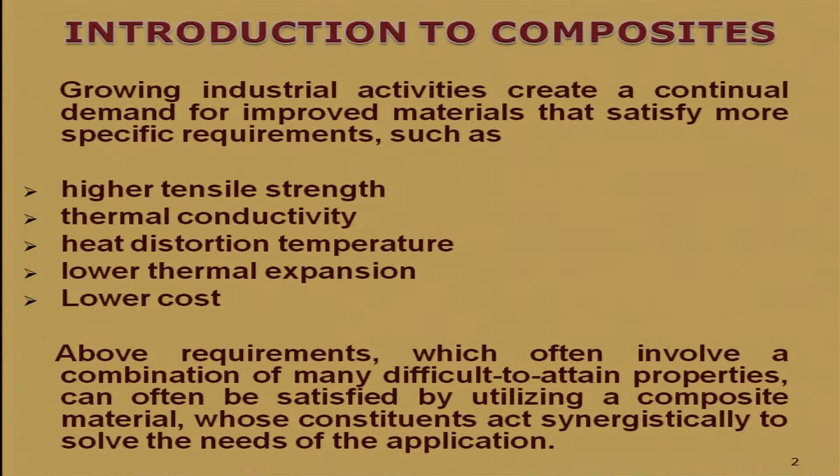Growing industrial activities create a continual demand for improved materials that satisfy more specific requirements such as higher tensile strength, thermal conductivity, heat distortion temperature, lower thermal expansion, and lower cost. These requirements, which often involve a combination of many difficult-to-attain properties, can often be satisfied by utilizing a composite material, whose constituents act synergistically to solve the needs of the application.

Definitions of composites: Composites are multifunctional material systems that provide characteristics not obtainable from any discrete material. They are cohesive structures made by physically combining two or more compatible materials different in composition and characteristics, and sometimes in form.

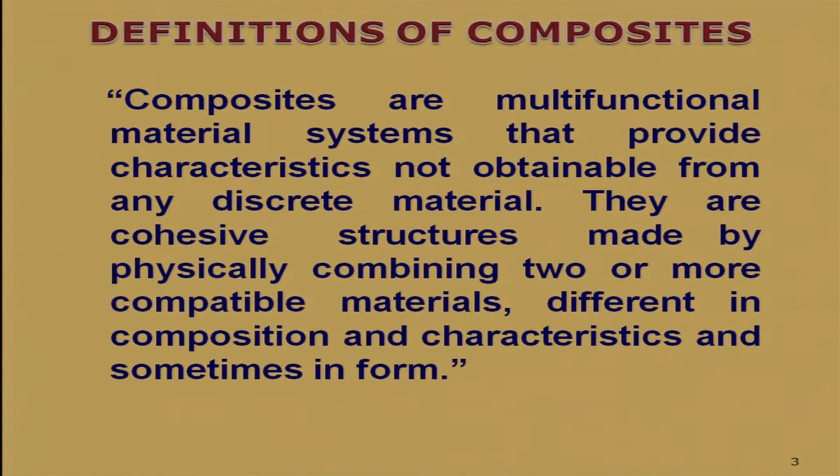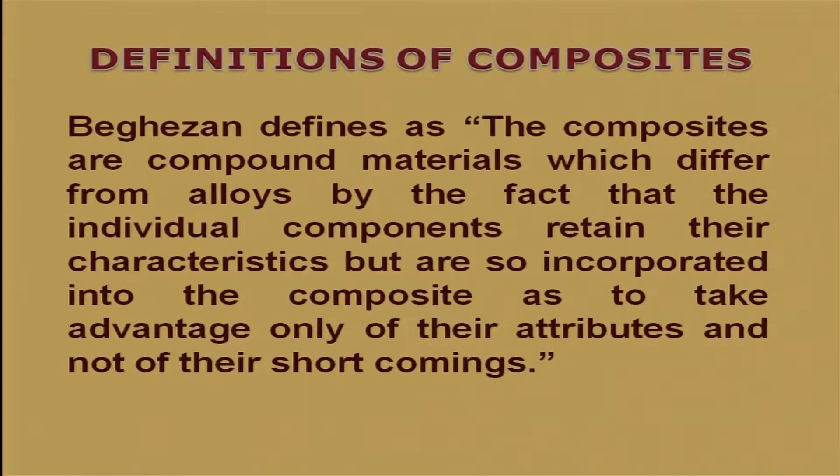Beghezan defined composites as compound materials which differ from alloys by the fact that the individual components retain their characteristics, but are so incorporated into the composite as to take advantage only of their attributes and not of their shortcomings. Now, composites can be explained by two different methods.

Composites can be classified into metal matrix composites, polymer matrix composites, and ceramic matrix composites. Composite material consists of two phases: one or more discontinuous phases, called reinforcement, embedded in a continuous phase called matrix. Composites can be classified into three categories: metal matrix composites, polymer matrix composites, and ceramic matrix composites.

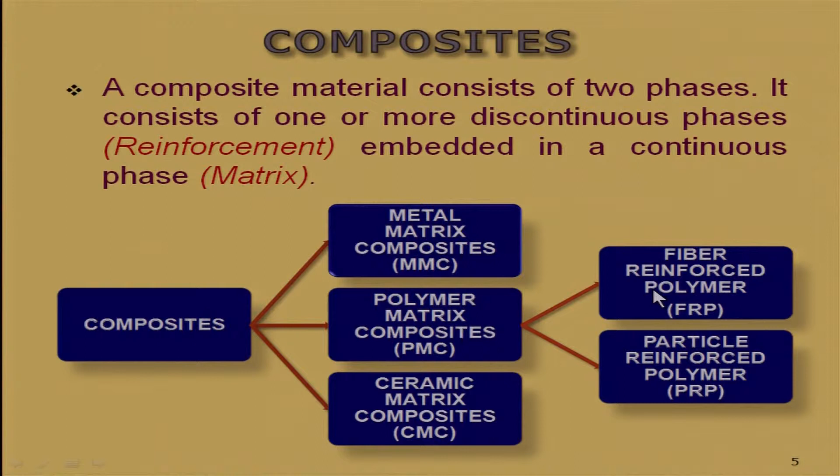We will focus on polymer matrix composite, which is subdivided into fiber reinforced polymer and particle reinforced polymer.

Advantages of composites: tensile strength 4 to 6 times greater than steel, 25 to 50% weight saving than metal, outstanding corrosion resistance, numerous fatigue and fracture attributes, excellent impact and damage tolerance characteristics, less noisy and lower vibration than metals. Like metals, thermoplastics have indefinite shelf lives and low thermal expansion.

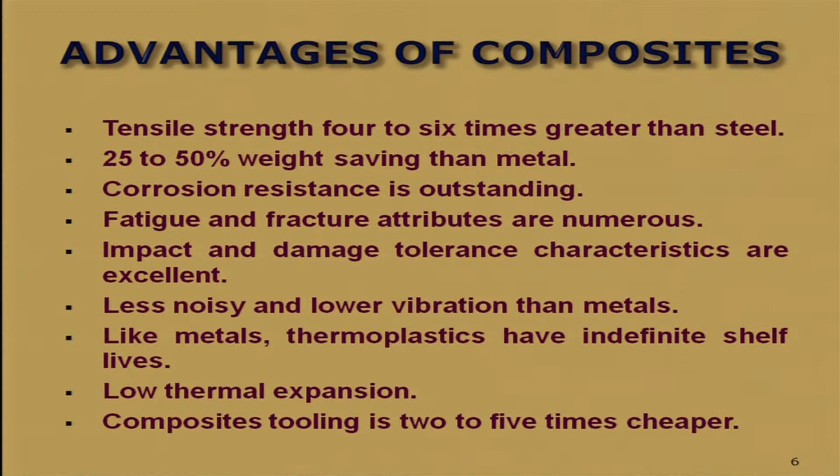Composites tooling is 2 to 5 times cheaper. Polymer matrix composite can be subdivided into fibrous composites and particulate composites.

This figure explains fibrous composites. These are the 4 figures in which various fiber patterns are shown.

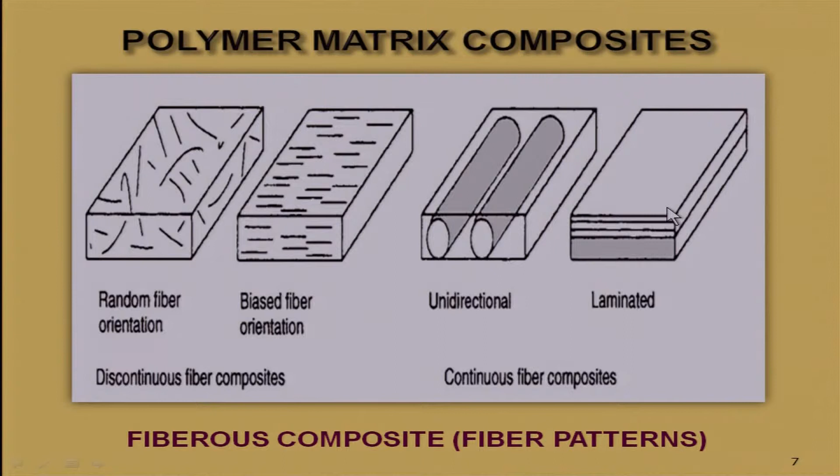In this one, the fibers are arranged randomly. In this one, bias fiber arrangement is used. In these, fibers are arranged in a unidirectional manner, and in this 4th figure, the fibers are laminated between two layers. Fibrous composites can be made by different techniques.

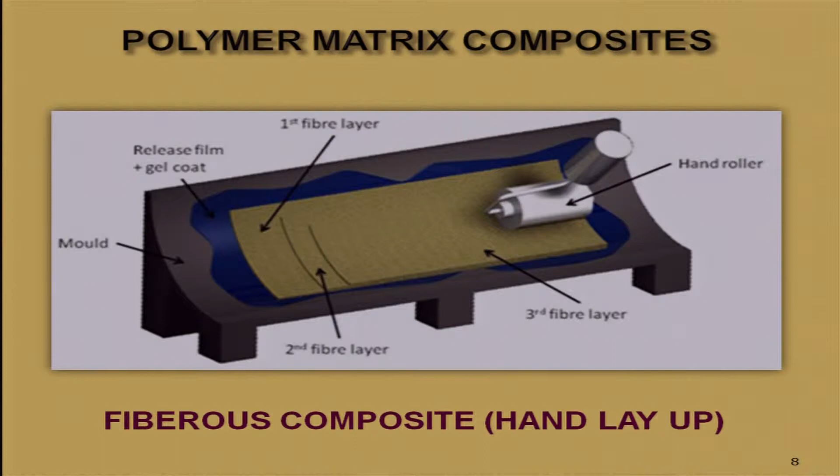This is the hand layup technique, in which the fibers are arranged manually and polymer is sprayed over the fibers, and the composite structure is prepared.

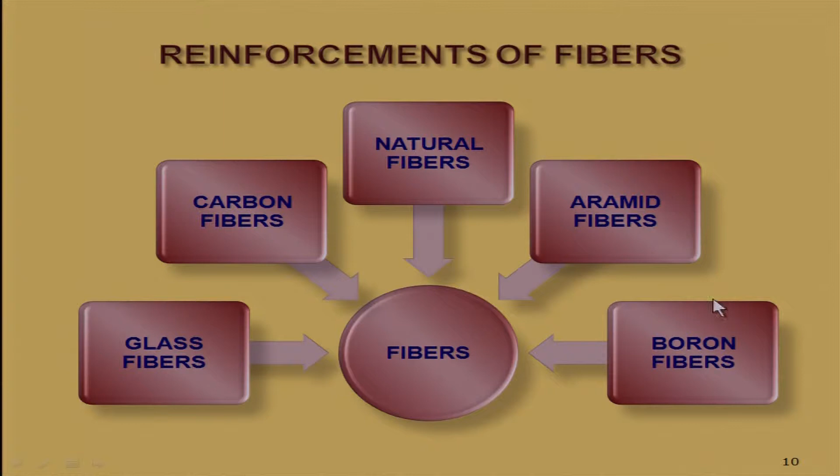The various fibers used in composite manufacturing are glass fibers, carbon fibers, natural fibers, aramid fibers, and boron fibers. The use of a particular fiber depends upon the end use application, which may be aeronautical, automobile, or customer-friendly applications.

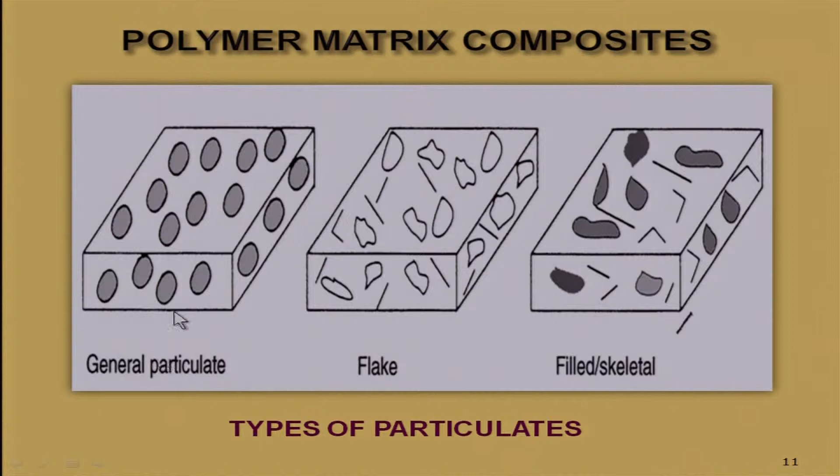The second method is particulate composite, in which 3 types of particulates are used: general particulate, flakes, and filled or skeletal type particulates. This is the method by which particulates are embedded in the resin structure. The particulates are added into the hopper, mixing with polymer material.

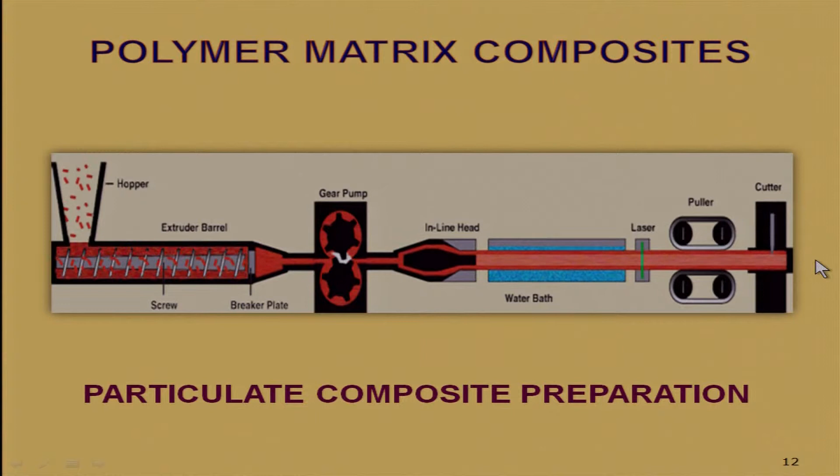In the barrel, the material of polymer and particulates is mixed, then they are stretched by the pullers and finally cut into granules.

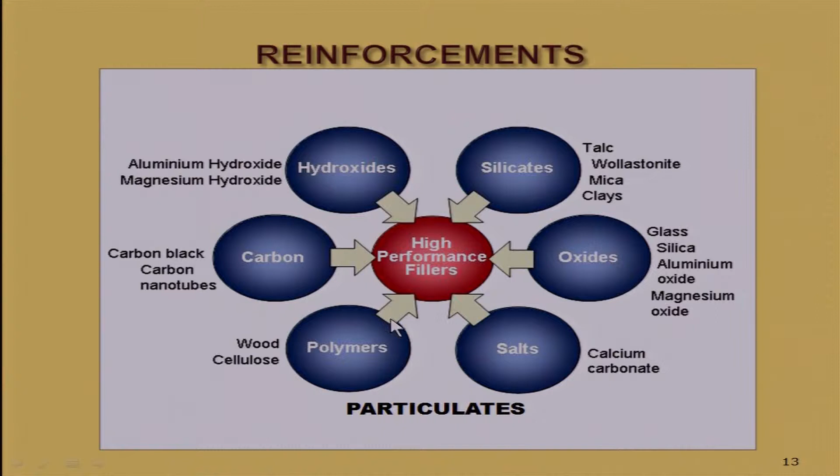Various particulates used in composite manufacture are hydroxides, silicates, oxides, and salts, along with polymers and carbon. These various forms of particulates are used for manufacturing various composites.

Advantages of fillers: particulates are fillers. They are used to add rigidity, stiffness or hardness, regulate thermal expansion and shrinkage, and improve heat resistance.

Fillers also improve or regulate electrical characteristics, increase strength and reduce creep, modify rheological properties, aid processability, modify appearance, alter density, and lower cost.

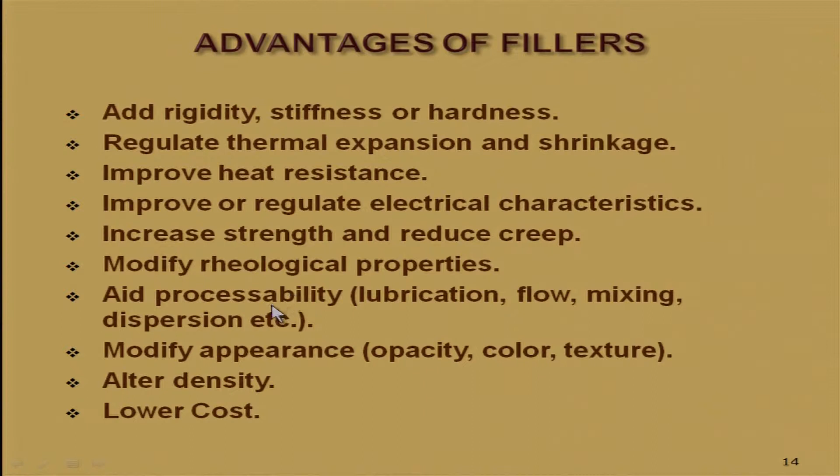Making of composite: how composites are manufactured. I will explain in the next slide how composites are manufactured.

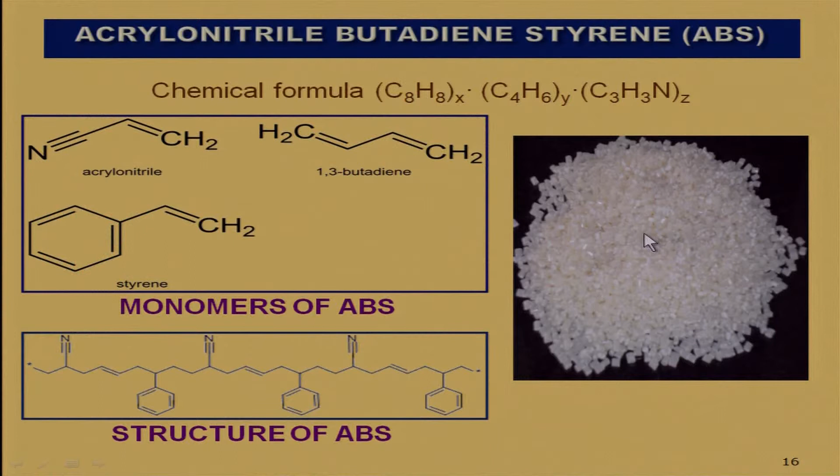I have taken the example of ABS material as a matrix material. ABS is nowadays used in automobile applications. This is the structure of ABS, and the granules are seen in the slides.

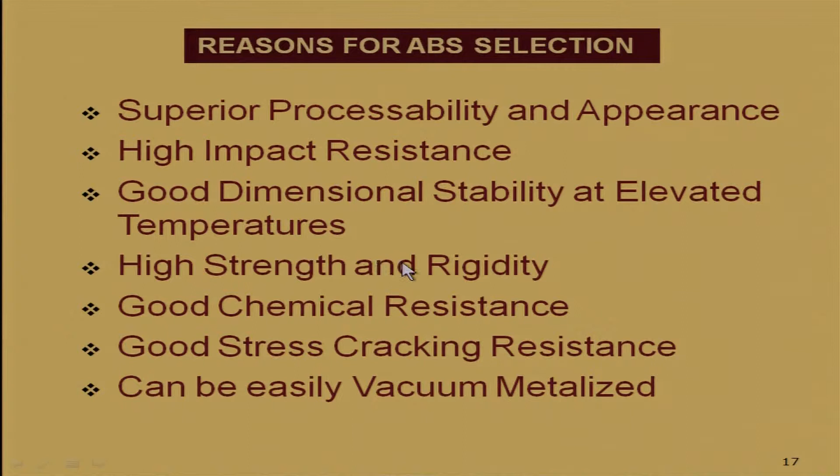Why is ABS selected for this composite manufacture? It has superior processability and appearance, high impact resistance, good dimensional stability at elevated temperatures, high strength and rigidity, good chemical resistance, good stress cracking resistance, and can be easily vacuum metallized.

The main drawback of ABS is that it is a highly costly material, and that is why I am using a filler to reduce the cost of the ABS material.

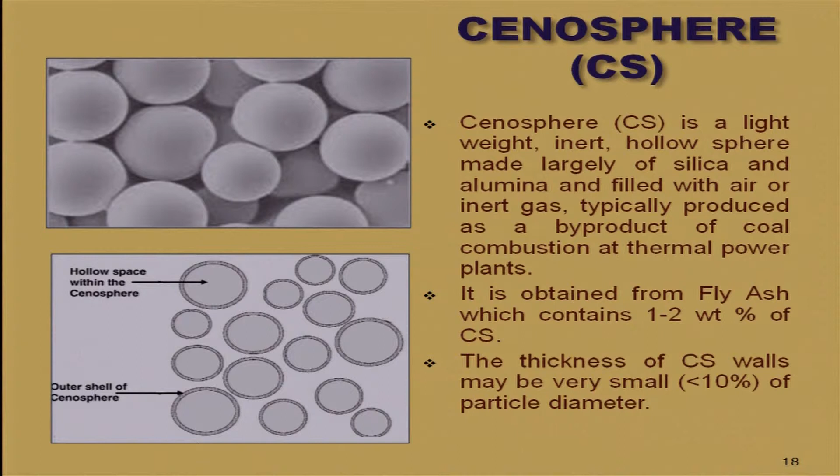It is obtained from fly ash, which contains 1 to 2% Cenosphere. The thickness of the Cenosphere walls may be very small, less than 10% of the particle diameter.

These are the basic properties of Cenosphere: spherical shape, inert, high melting point, lightweight, free-flowing material, insulating material, and low water absorption.

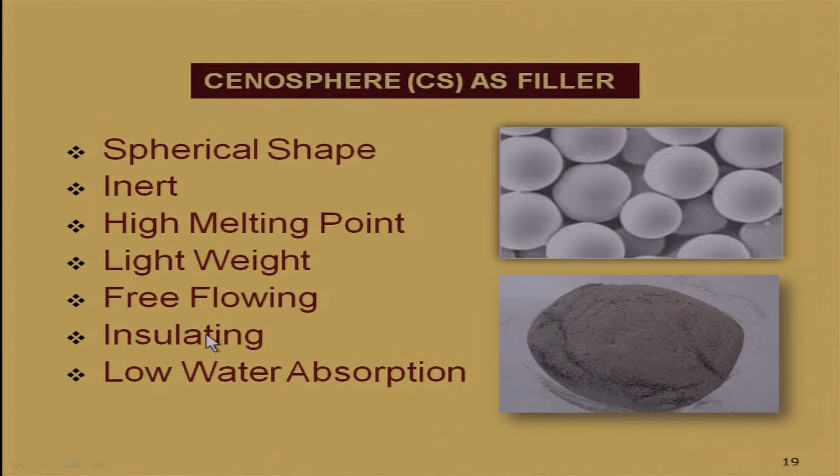Now, this is the method by which the composite is prepared. ABS material is pre-dried at 85 degrees centigrade for 2 to 3 hours before compounding.

ABS-Cenosphere composites were prepared using a co-rotating twin screw extruder at a temperature range of 220 to 230 degrees centigrade.

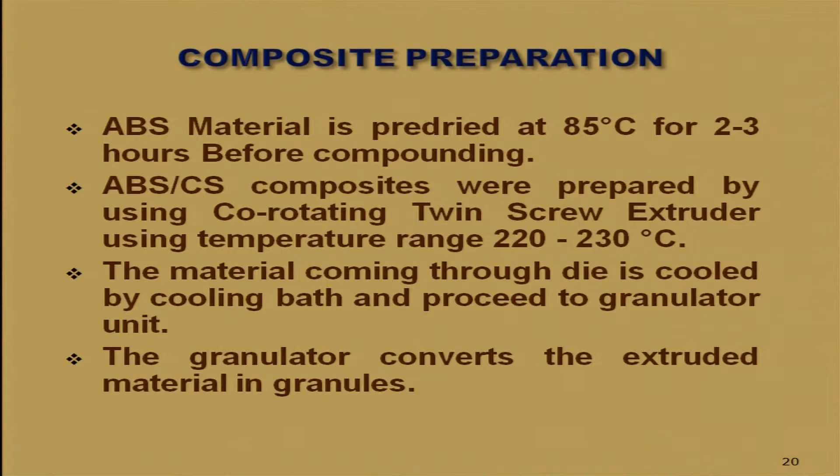The material coming through the die is cooled by a cooling bath and proceeds to the granulator unit. The granulator converts the extruded material into granules.

This is a short schematic view of composite preparation. Here are the ABS granules, which are mixed with Cenosphere.

They are compounded in a twin screw extruder and converted into granules. These granules are used for making plastic products in automobile applications, household applications, or aeronautical applications.

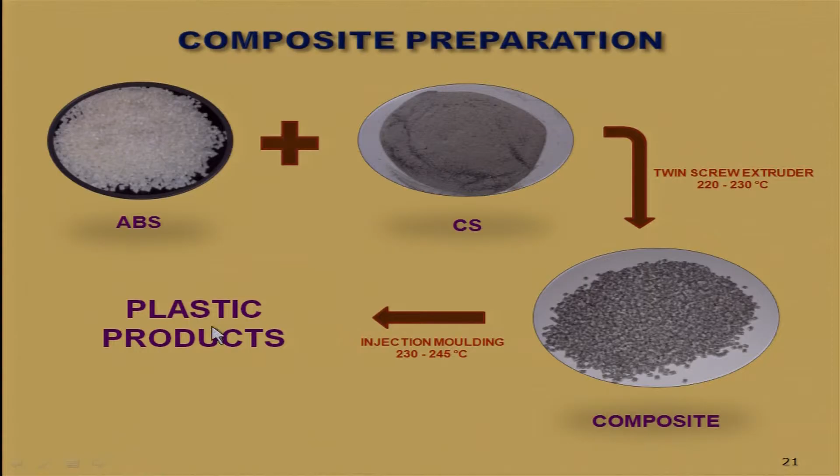And this is the video showing how composites are made.

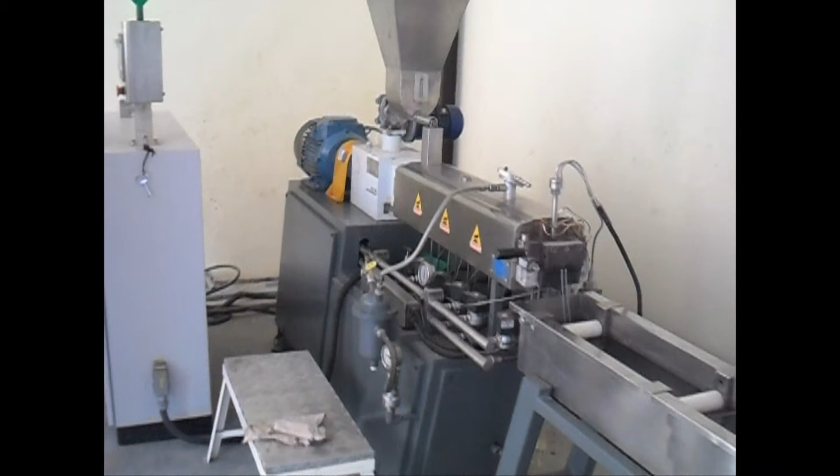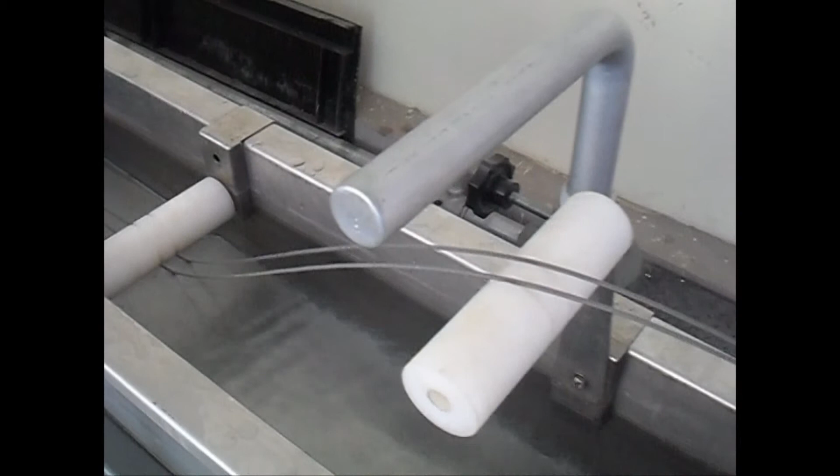This is a video which shows the composite preparation method.

ABS material and cenospheres are taken in various compositions. They are mixed and put into the extruder. The extruder compounds the material and converts it into granules by various heating techniques.

Viewers, in this video lecture, I will explain various composite preparation techniques, including the use of ABS polymer and cenosphere material, by which we have prepared the ABS-cenosphere composite.